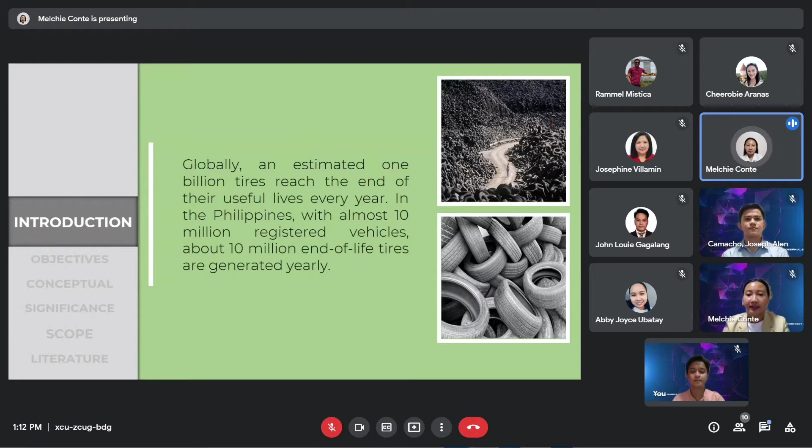Globally, an estimated 1 billion tires reach the end of their useful lives every year. In the Philippines, with almost 10 million registered vehicles, about 10 million end-of-life or waste tires are generated yearly. Due to improper waste management and regulation in our country, these used tires frequently block rivers and drainage systems or are inefficiently piled up in landfills, trapping hazardous gases like methane and providing breeding grounds for disease-carrying mosquitoes.

So where do these used tires usually go? According to Beretson 2018, 49% of these tires are burned into fuel, releasing dark, thick smoke that contains cyanide, carbon monoxide, and sulfur dioxide, which pollutes air and ocean.

26% are ground into filler for asphalt and insulation. 11% are dumped into landfills. 7% are blended into civil engineering uses. And the other 7% are recycled into things like playground surfaces and tire swings.

About this, the researchers want to develop the remaining 11% into something useful for engineering purposes and to promote the use of waste tires for much eco-friendlier and pollution-free purposes.

In addition, according to El-Gammal 2010, recycled waste tire rubber is an auspicious material in construction due to its lightweight, elasticity, energy absorption, sound, and heat insulating properties. Thus, the researchers will conduct a study focusing on substituting fine aggregates with rubber tire crumbs.

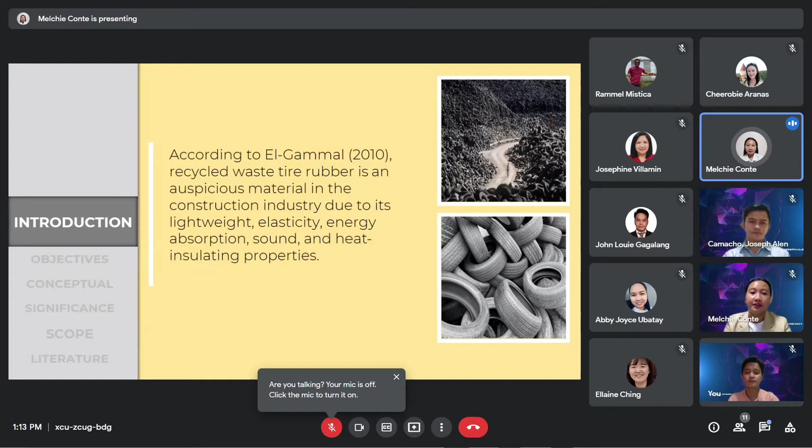Throughout the study, the researchers will evaluate three classes of concrete mixture containing different sizes of rubber tire crumbs to determine the mixture's first compressive strength, second flexural strength. And to discuss the objectives of the study, we have Mr. Camacho.

For the objectives of the study, the main aim is to utilize waste crumb tire rubber as an alternative fine aggregate in making concrete paving blocks. Specifically, this research aims to, Objective 1: produce three classes of concrete mixtures with sizes 4.75 mm, 1.18 mm, and 0.3 mm of rubber tire crumbs and obtain the mixture with the highest compressive strength.

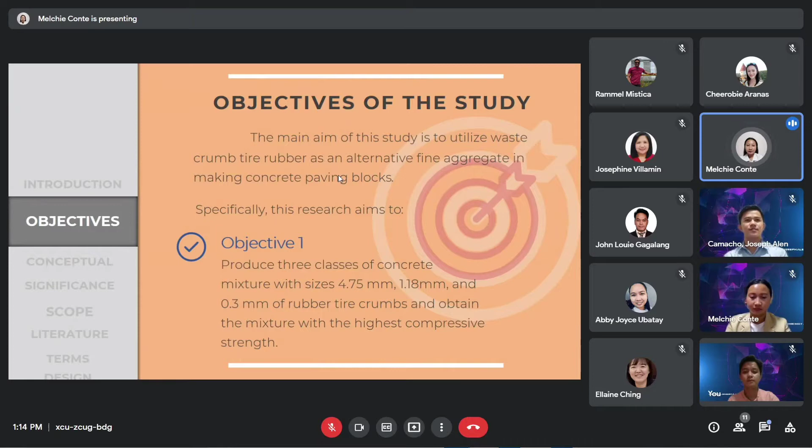For Objective 2, we need to determine the engineering properties of concrete paving blocks infused with rubber tire crumbs, such as unit weight, flexural strength, and water absorption. Lastly, Objective 3, we need to analyze if rubber crumbs are feasible as an alternative fine aggregate for concrete paving blocks based on the results.

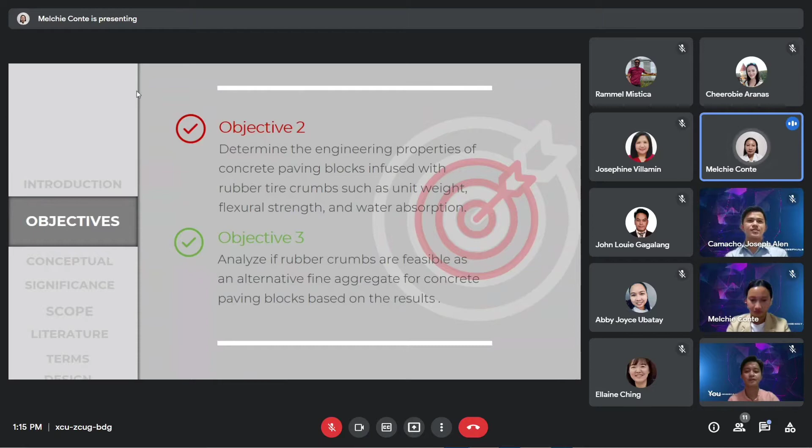To present the conceptual framework, we have Mr. Jason Katimba. For the conceptual framework, in phase 1, which is the input, are the materials and equipment we are going to use in this study. The main materials are cement, rubber tire crumbs, coarse aggregates, and water. The equipment necessary for compressive strength is the compression testing machine, and for flexural strength is the flexural testing machine. The manual we are going to use is the Testing Concrete from CS1 2010 manual.

For phase 2, which is the process, are the procedures in producing the three classes of concrete mixture using tire crumb sizes 4.75 mm, 1.18 mm, and 0.3 mm as an alternative aggregate. This procedure includes the proper measuring, mixing, molding, curing, and testing of each block.

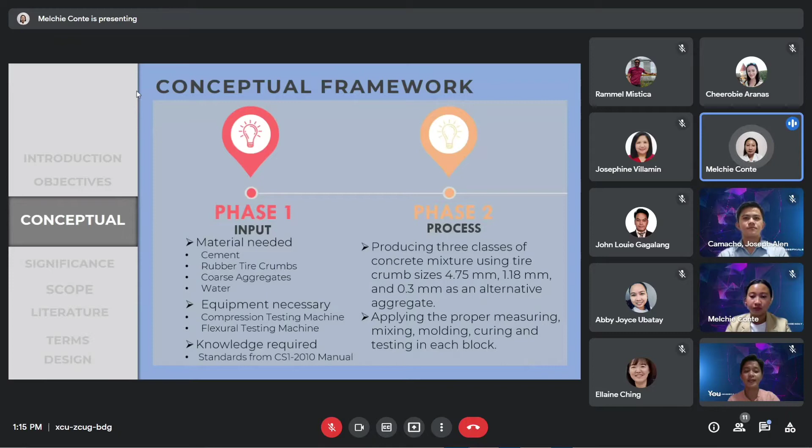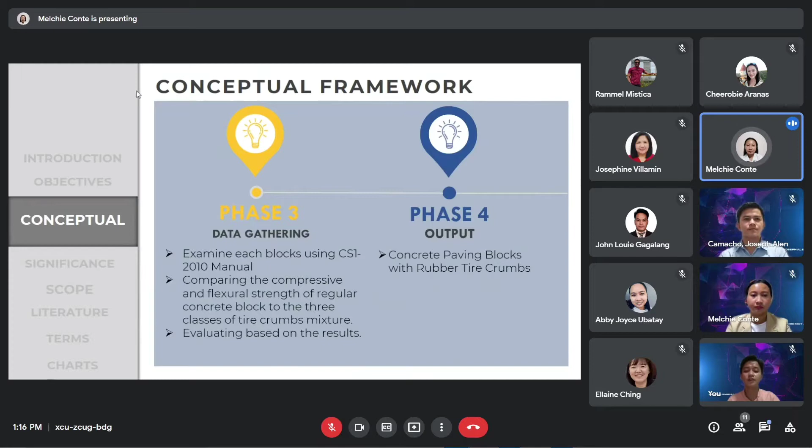For phase 3, which is data gathering, we're going to examine each specimen according to the CS1 2010 manual, comparing the compressive and flexural strength of the regular concrete block to the three classes of the tire crumb mixture, and evaluate the test results. For phase 4, our output is the specimen of concrete paving block with rubber tire crumbs that completed the procedure correctly.

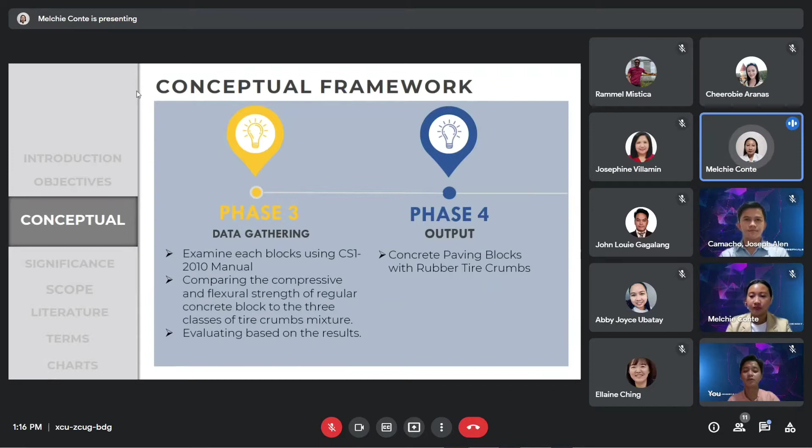For the significance of the study, the results of the experimental research will be beneficial to the following groups. First is the university: the research study will contribute new ideas regarding the different use of rubber tires in the field of construction, and it will contribute to the university's research and development program.

Next, we have the faculty: additional data and information that can be used by the teachers in class discussions. For students, this will provide factual information about the altered use of rubber tires for construction.

Next, we have the researchers. Through these studies, the researchers would be able to recognize if rubber tire crumbs are feasible to use in the field of construction, and it will also help them gain new knowledge and experiences.

Lastly, we have future researchers. This study can be used by future researchers as a guide and source of information, which will help them develop products using waste materials.

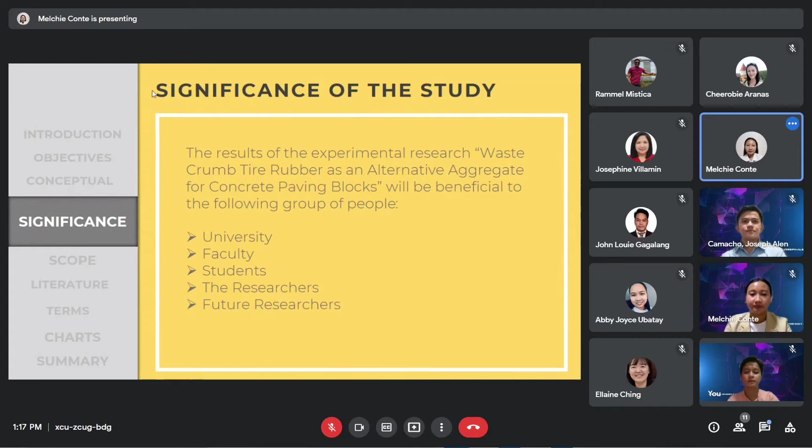For the scope and limitations of the study: these are the extent to which the research area will be explored and the parameters within which the study will be operating.

First, we will produce concrete blocks in three classes of concrete mixture with sizes 4.75 mm, 1.18 mm, and 0.3 mm, using waste tire rubber as fine aggregates, gravel as coarse aggregates, Portland cement as binder, and water.

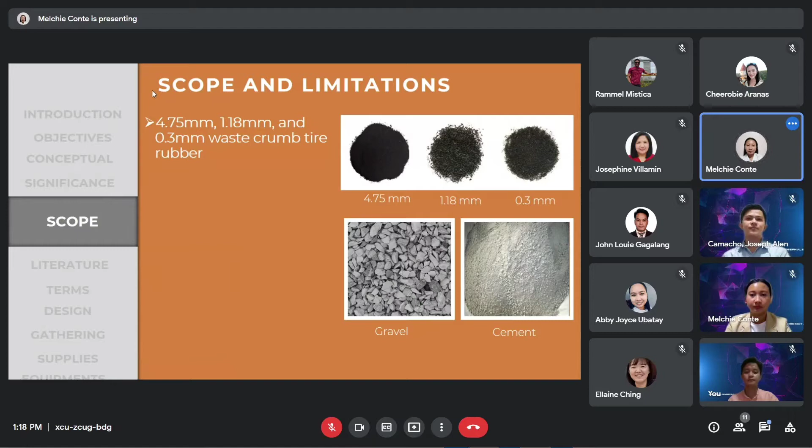We will use the safest concrete grade, which is M15, with a ratio of 1:2:4 — 4 parts gravel, 2 parts rubber, and 1 part cement.

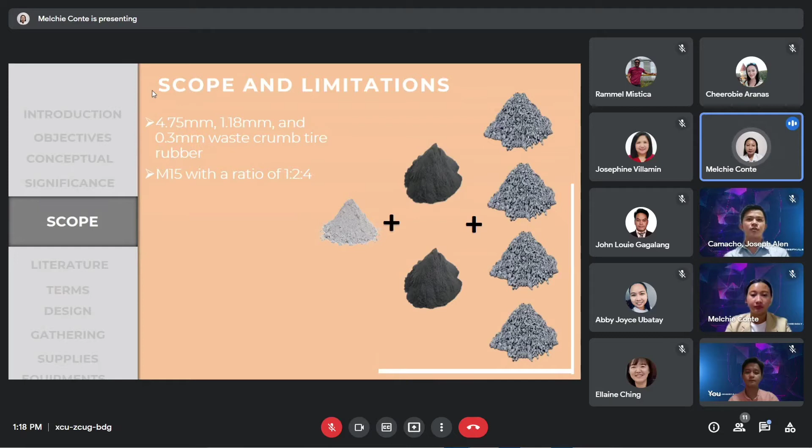Using a wooden concrete cube mold, the mixture will be molded into a 15 cm by 15 cm by 15 cm concrete cube to be submitted for compression testing, and a 15 cm by 15 cm by 75 cm rectangular concrete block for flexural strength testing.

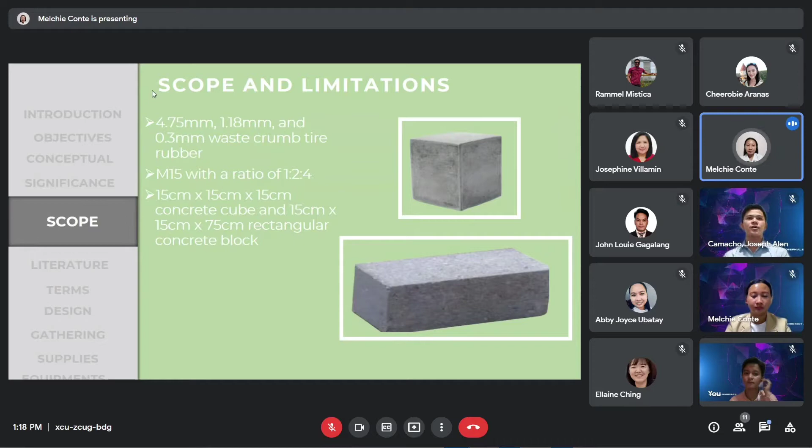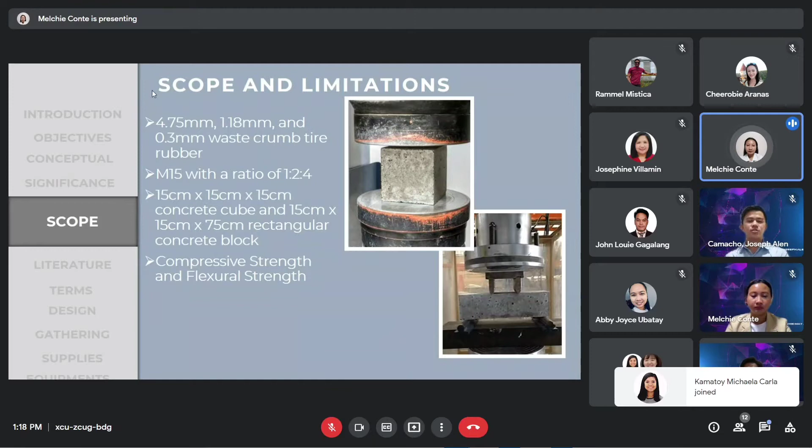The primary concentration of the study is bounded only to the compressive and flexural strength of the concrete paving blocks, which will be used specifically for walkways.

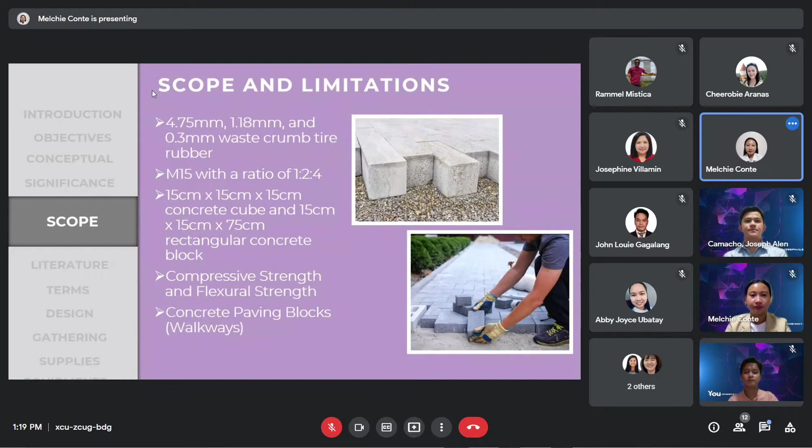For our literature review, the researchers chose the most important variables used in conducting this study: rubber tire crumbs, water absorption, compressive strength, and flexural strength.

For tire rubber, based on the research of Ivana Barisic entitled 'Recycling Waste Rubber Tire in Road Construction,' it has been discovered that adding crushed rubber to cement stabilizers decreases the pressures caused by material shrinkage. Low water capillary absorption of rubberized cement-treated aggregates is also mentioned as a benefit, which is a desirable feature for more durable pavement foundation layers.

According to Agne, Agbilo, and Reyes' study entitled 'Concrete Mixture with Crumbed Tire Rubber,' the concrete mixture having 0.75 up to 10% of crumbed tire rubber as a partial substitute for coarse aggregates passed the allowable compressive strength for lightweight concrete.

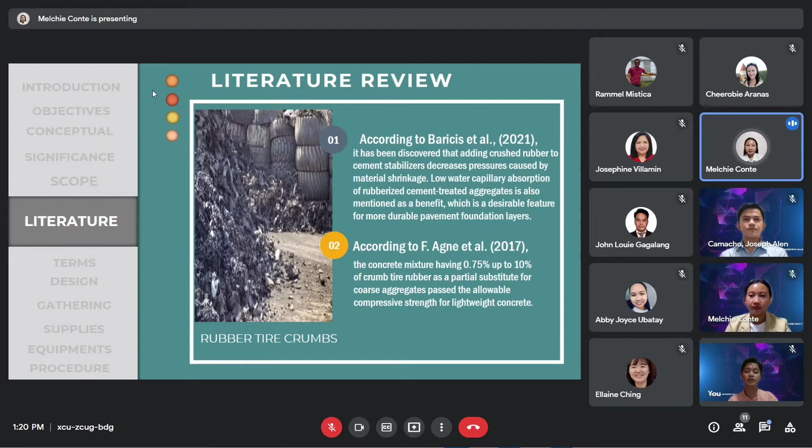For compressive strength, based on the case study 'Waste Tire Rubber Particles Modified by Gamma Radiation and Their Uses as Modifiers of Concrete,' conducted by Barrera, Diaz, Rabanal, Gayare, Lopez, and Olivares, the concrete's compressive strength values with waste tire rubber particles were investigated as far as parameters: curing time, tire rubber particle size, and particulate concentration. As per curing time, compressive strength increases as curing time increases. As per particulate concentration, compressive strength value gradually decreases as particulate concentration increases.

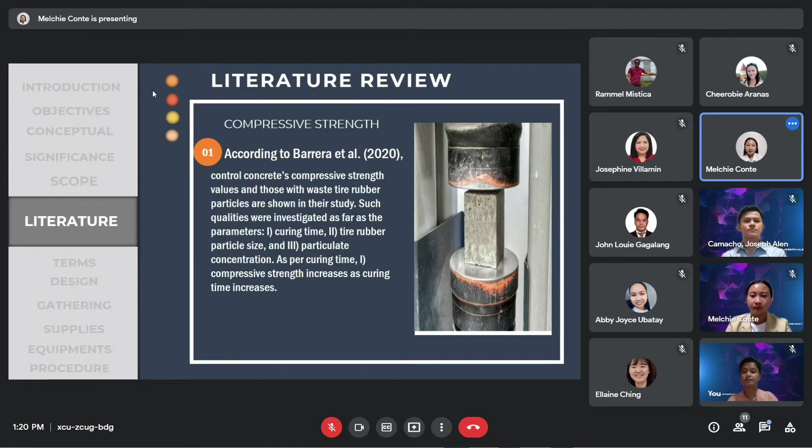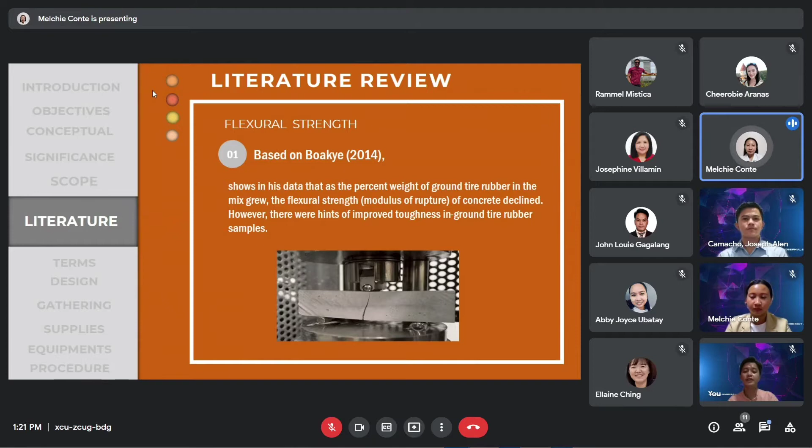For flexural strength, based on the study 'Ground Tire Rubber as a Component Material in Concrete Mixture for Paving Concrete,' conducted by Richard Twumasi-Boakye, as the percent weight of ground tire rubber in the mix grew, the flexural strength of the concrete declined. However, there were hints of improved toughness in ground tire rubber samples.

For water absorption, based on Meherier's study 'Investigation of Mechanical and Durability Properties of Cement Mortar and Concrete with Varying Replacement Level of Crumbed Rubber as Fine Aggregate,' the addition of crumbed rubber to concrete enhanced the ability of concrete cylinders to absorb water. According to his research, replacing 10% and 20% of crumbed rubber in the mix enhanced the water absorption capacity by 5% and 8% respectively, compared to the specimen without any rubber in the mix.

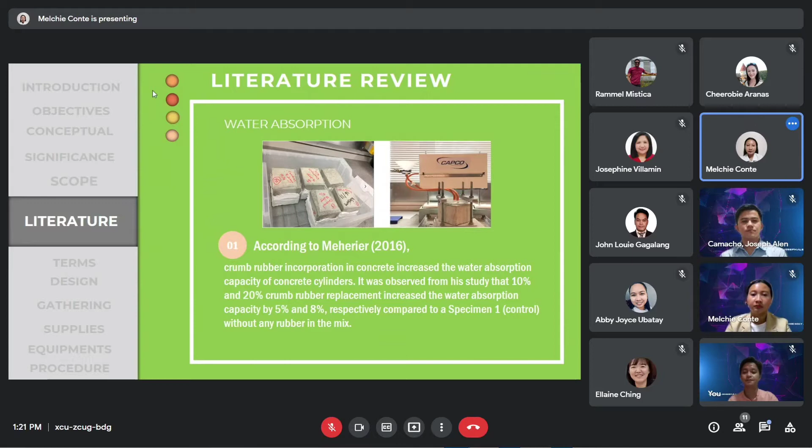For the definition of terms, this section contains all the important terms used in the present study. Compressive strength is characterized as the limit of a concrete paving block to endure loads before failure.

Next, we have concrete testing: quality tests on concrete pavement blocks performed as part of quality control on concrete structures.

Next, we have crumb rubber: recycled tire and tar material from vehicles, trucks, and other vehicles that are worn out, damaged, or replaced.

Next, the CS1 2010 Manual: a reference manual that sets out methods and procedures to be adopted for sampling and testing concrete, both on-site and in laboratory.

Next, curing, characterized as giving satisfactory moisture, temperature, and time to allow the crumbed tire rubber concrete to accomplish the ideal properties for its intended use.

Next, we have flexural strength. This pertains to the ability of concrete paving blocks to resist bending deflection when energy is applied to the structure. Next, moisture content, the quantity of water contained in concrete paving blocks.

And lastly, we have sieve, a tool for sifting the crumb tire rubber to sort the particles according to size of 4.75, 1.18, and 0.3 millimeters.

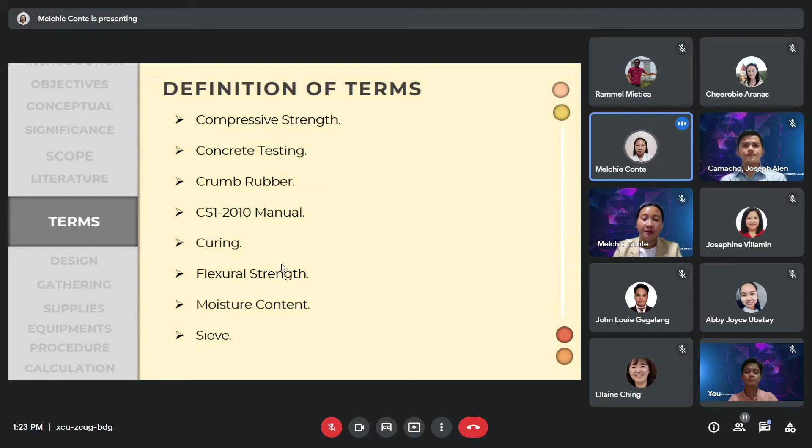For the research design, the method that will be used by the researchers of the study is an experimental research method. The purpose of the experimental research strategy is to establish the existence of a causal relationship between the two variables.

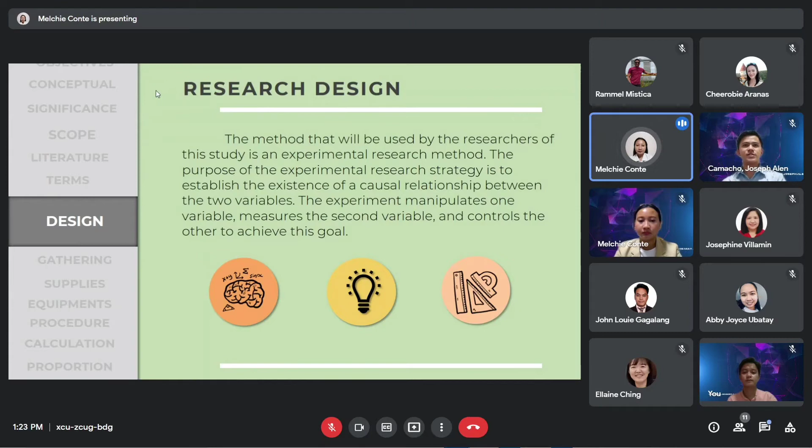For the data gathering, to obtain data, information, and method, the researchers will use a variety of sources, including existing research, books, a professional journal, newspaper, magazine, existing works, website links, government reports, and other publications. This will assist the researchers in conceptualizing and planning the study's completion.

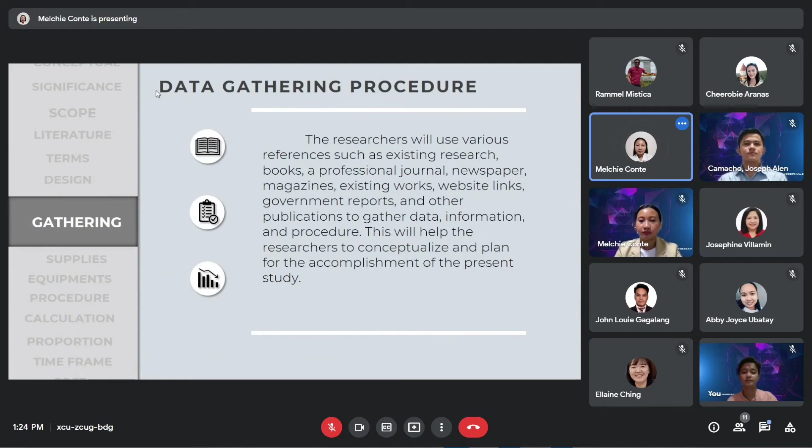For supplies and materials, this table lists all the supplies and materials required for the project study, along with their quantities and specifications. The researcher will use 80 kilograms of ordinary Portland cement, 300 kilograms of coarse aggregates, 120 kilograms of rubber tire crumbs, and 30 kilograms of water.

Cement, coarse aggregates, fine aggregates, water, and crumb tire rubbers will be mixed in a 15 by 15 by 15 centimeters molder for the compression test, and a 15 by 15 by 75 centimeter molder for the flexural test.

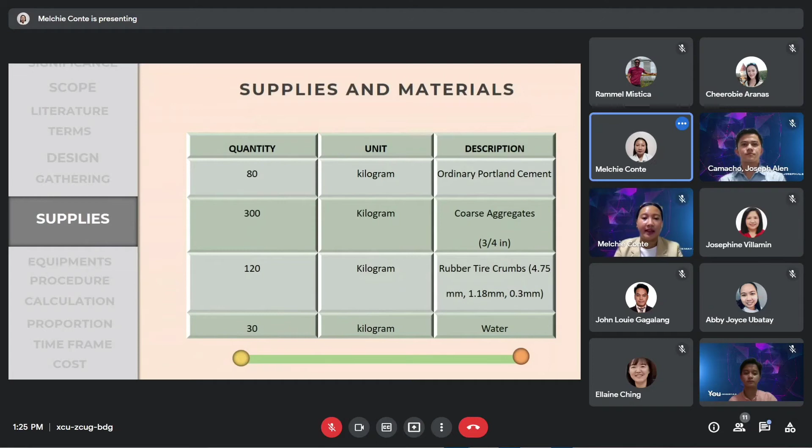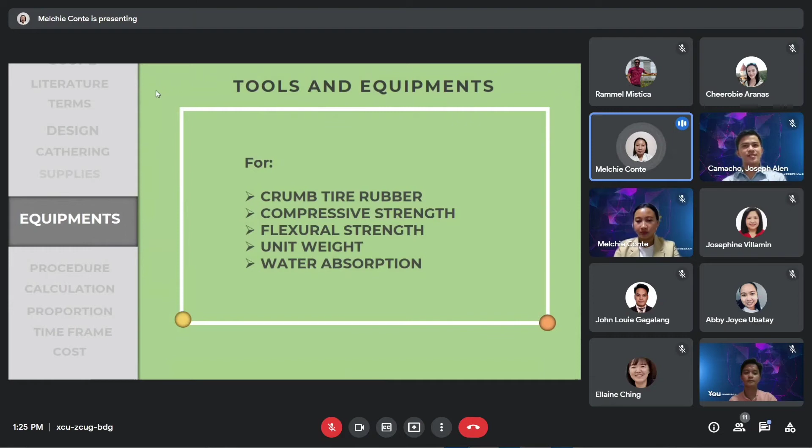We have here the tools and equipments we use in making crumb tire rubber in compressive strength test, flexural strength test, unit weight, and water absorption.

For crumb tire rubber, we will use a chisel to remove the steel belt from the tires. The utility knife will be used to remove the tire's sidewall. The leather gloves will be used to protect the hands from sharp blades.

The sieve with number 4, 16, 50 will be used to sieve fine aggregates, which are the crumb tire rubbers, sizes 4.75 mm, 1.18 mm, and 0.3 mm. The scale will be used to measure the weight of the concrete mixture.

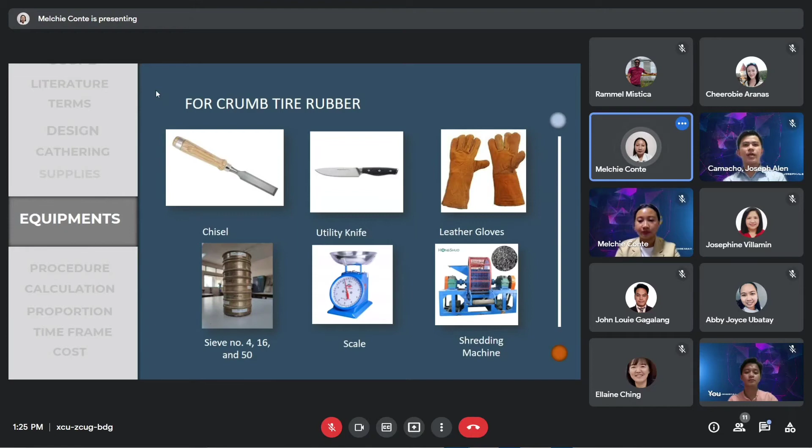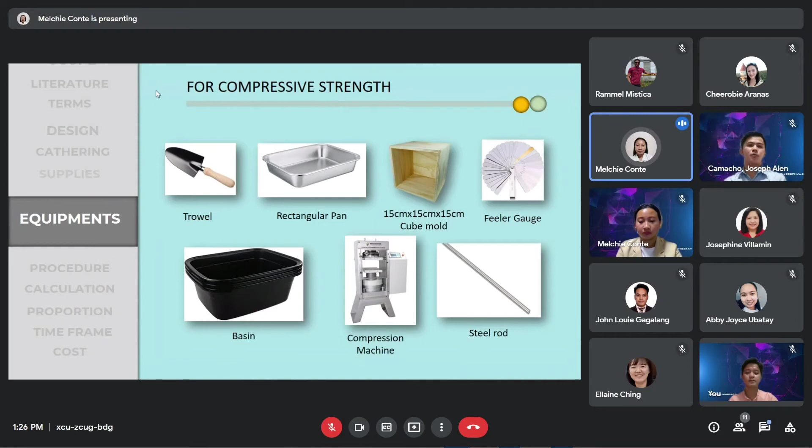The basin will be used to cure the concrete cubes for 14 and 28 days respectively. The concrete machine, or the compression machine, will be used to determine the concrete blocks' compressive strength. And the steel rod will prevent honeycomb or voids from forming in the concrete blocks by tamping the sides of the mold.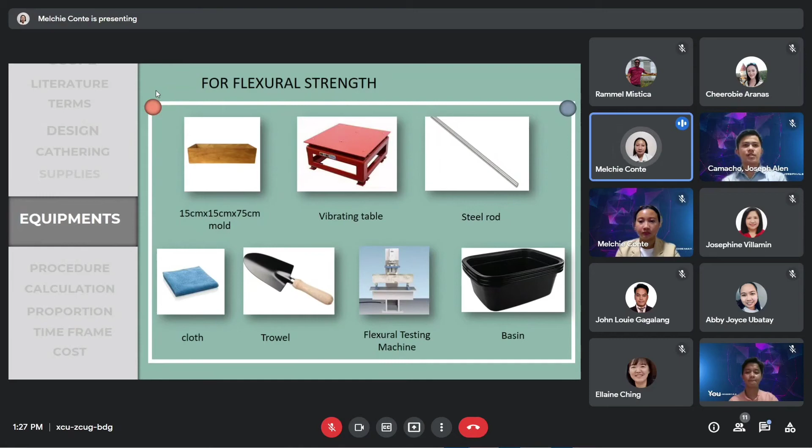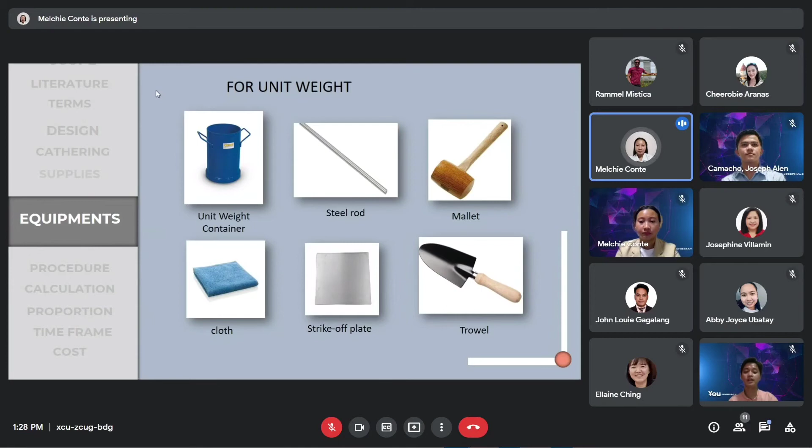The cloth will be used to wipe away the excess mixture. The strike-off plate will be used to strike off the top surface of the container for unit weight. The trowel will be used to mix the ingredients.

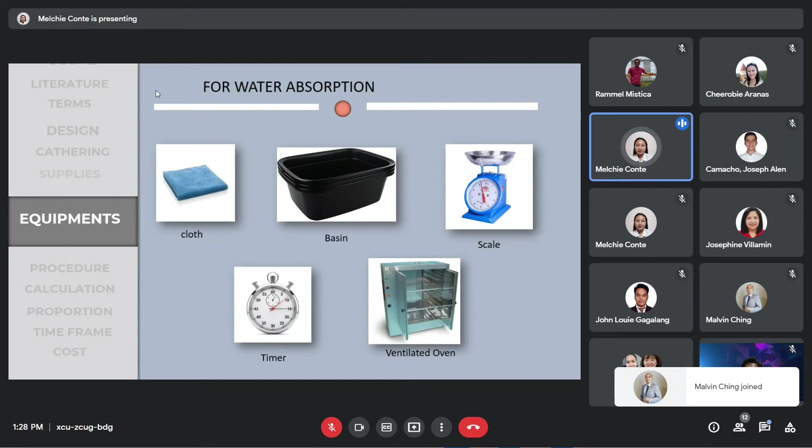For water absorption, we will use cloth to wipe excess water on the surface of the specimen. A basin is used to submerge concrete blocks underwater. A scale will be used to measure the mass of the specimen. A timer is used to set the time for each specimen to dry. A ventilated oven will be used to dry the specimens.

For our construction procedure, the first step is the production of rubber tire crumbs with specific particle sizes of 4.75 mm, 1.18 mm, and 0.3 mm.

The second step is to determine the unit weight based on ASTM C138, which is essential for the weight calculation process. The third step is to determine the water absorption based on ASTM C140, which gives an idea of the strength of the concrete paving block.

The fourth step is to determine the flexural strength based on the CSI-2010 manual. It is important because it measures the concrete paving block's ability to resist breaking when pressure is applied.

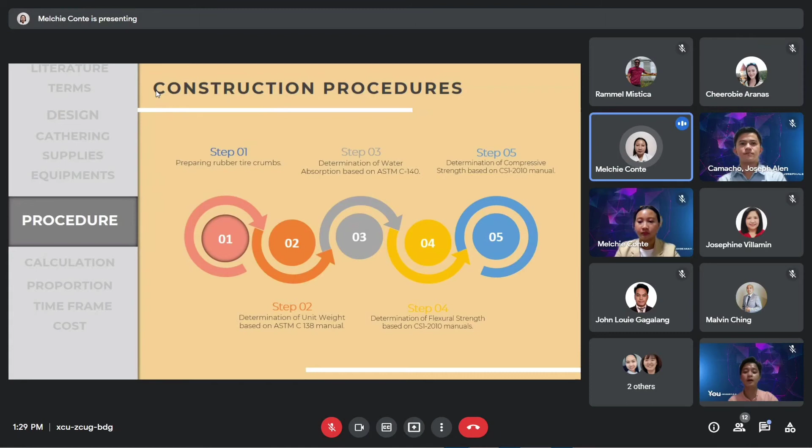The final step is the determination of compressive strength, also based on the CSI-2010 manual, which is essential in this study because it will be the limit of the concrete paving blocks to endure loads before failure.

For the design calculation, the table shows the bulk density of each material that will be used in the concrete mixture, based on the bulk density chart of annual bulks.

Ordinary Portland cement has a bulk density of 1,362 kilograms per cubic meter, while gravel aggregates and rubber crumb aggregates have a bulk density of 1,762 and 352 kilograms per cubic meter, respectively. The data above is an approximate bulk density only.

The researcher will use the bulk density method to calculate cement, fine aggregate, and coarse aggregate quantities. The proper mix proportion used in this study is 1:2:4, graded as M15.

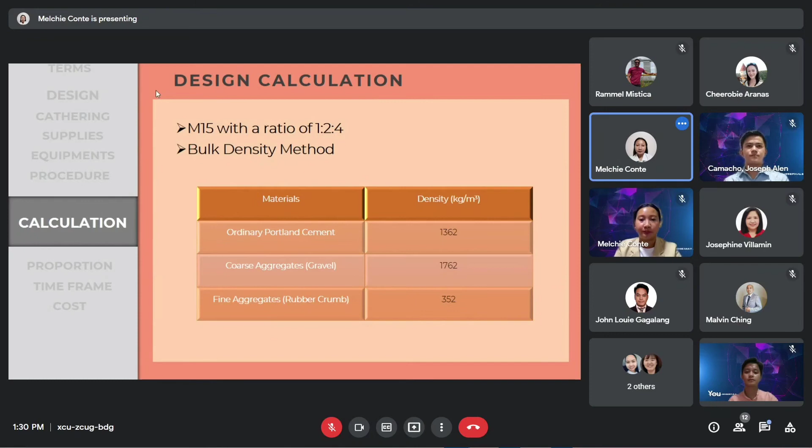We can see here the mix proportion of concrete blocks. For concrete cubes, there are 3 mixtures with the same mix proportion, but the only difference is the size of tire rubber crumbs used as fine aggregate replacement.

0.3 mm for mixture 1 and 4, 1.18 mm for mixture 2 and 5, and lastly, 4.75 mm for mixture 3 and 6.

In order for us to make one piece of concrete cube, we need 1.12 kilograms of cement, 5.79 kilograms of gravel as coarse aggregates, 0.58 kilograms of tire rubber crumb as fine aggregates, and 0.62 kilograms of water.

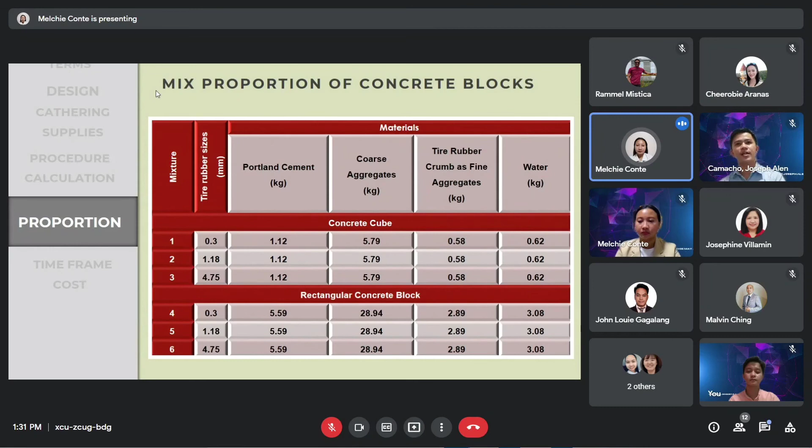While in making one piece of rectangular concrete block, we need 5.59 kilograms of cement, 28.94 kilograms of gravel as coarse aggregates, 2.89 kilograms of tire rubber crumb as fine aggregates, and 3.08 kilograms of water.

For our construction time frame, this is the duration of our planning until the evaluation of the specimen.

The first week is the planning. The second week is the collection or gathering of data. The third week is the preparation of materials as well as the cutting and shredding process of the tire rubber. The fourth week is still cutting and shredding, assuming it will not be finished in one week.

The fifth and sixth week is the construction of forms. The seventh week is the designing and analyzing of the specimen. The eighth week is the construction of the product. The ninth and tenth week is the reconstruction and revisions.

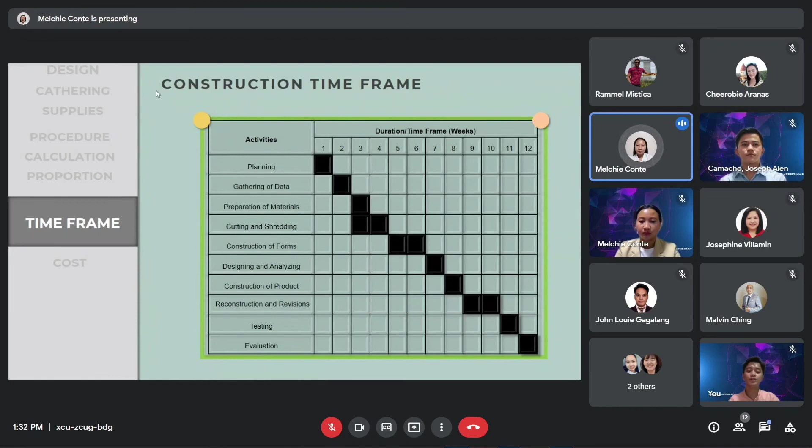The 11th week is the testing of the specimen for its compressive and flexural strength. And finally, the last week, the 12th week, is the evaluation from the data that the researchers gathered from the previous procedures.

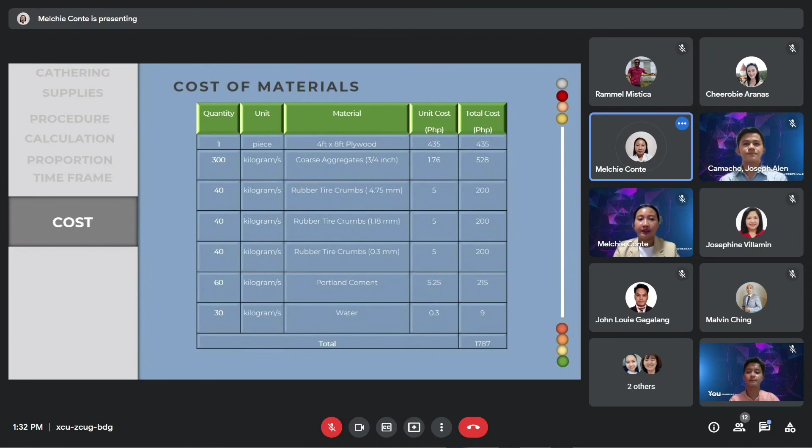For the cost of materials, the table presents the cost of materials that will be used in the present study. The table indicates the precise and vivid use of materials for the study.

This includes one piece of 4 feet by 8 feet plywood, which costs 435 pesos per piece; 3/4 inch of coarse aggregates amounting to 1 peso and 76 centavos per kilogram; 4.75, 1.18, and 0.3 millimeter rubber tire crumbs for 5 pesos per kilogram; Portland cement costing 5 pesos and 25 centavos per kilogram; and water amounting to...

0.3 pesos per kilogram. The data presented is only the approximate cost of each material based on the data gathered, with a total cost of 1,787 pesos.

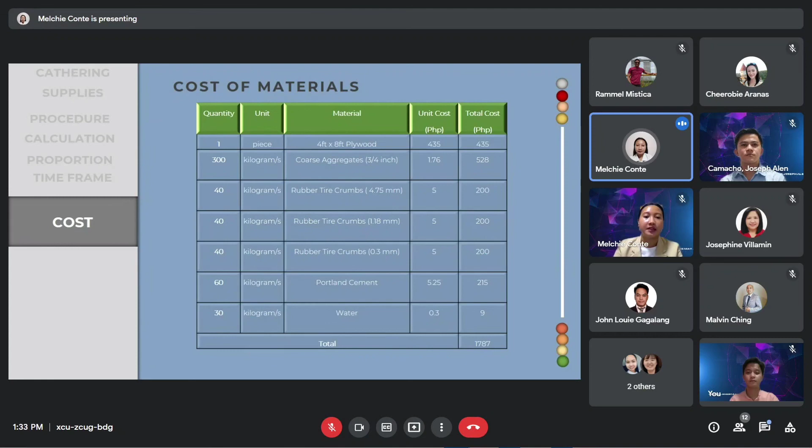Thank you for listening to our virtual presentation entitled 'Waste Tire Rubber as an Alternative Fine Aggregate for Concrete Paving Blocks.' And now, the room is open for any suggestions, questions, and clarifications.